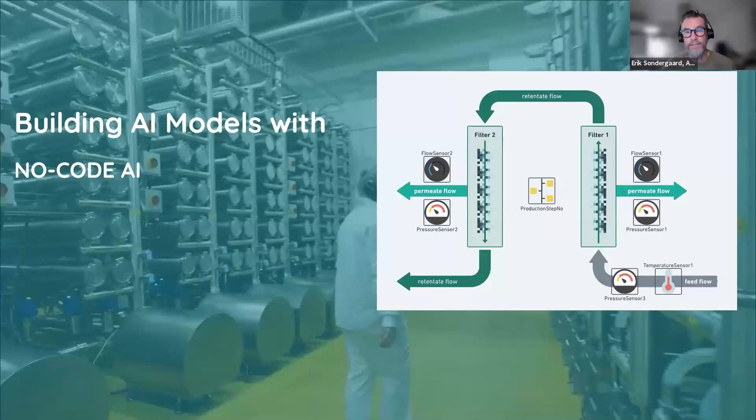So in IntelliSea, it looks like this. We have a menu on the left side, which is almost always the case with this type of software. And I want to create a model, and the way I want to create the model is that I want to detect this anomaly.

I go through this wizard and say, okay, what do I want to measure? I want to measure the flow sensor on one side, and I get immediately a trend curve, and you can see how fast the system is if you are zooming in or zooming out. Then I say, okay, what could have an impact? And I put in all the parameters that could have an impact on a filter breach, and I add the equipment and click next.

I give it a name, just like creating a Word document, and we now have the model. I will then say, okay, let's train the model, and it will be training for around 20 minutes.

Now I can see there are 2 lines up here, a yellow one and a blue one, and it's with the 2 filters that you are looking on. If I go back in the history data, I can see there are some red lines here. If I pause the movie here, you can see that these 2 lines should be very equal, but here there is a difference, and I can see the difference down here as well. Then it tells me there is a small breach in the filter.

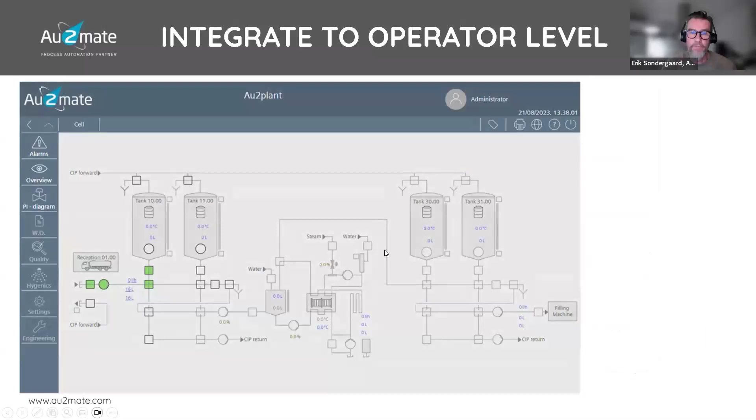Then the operator knows he should not make such big adjustments. So on the right side of the line, it's more flat, and they can go closer to the set points. For the operator running on the SCADA system, they've put in an AI button, and it will show them the historical data and the future data. That's how it's used.

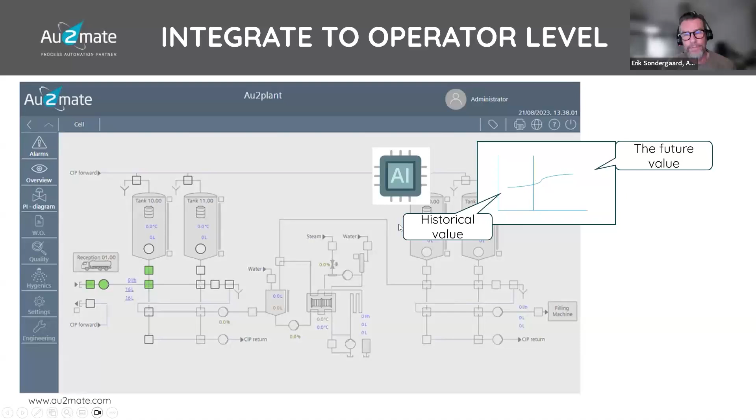The next two slides are more for sending out. Grace will send it out, but there are the typical issues people have when we talk to them and they are interested in AI. I'm almost running out of time, so I'll go a little faster through these.

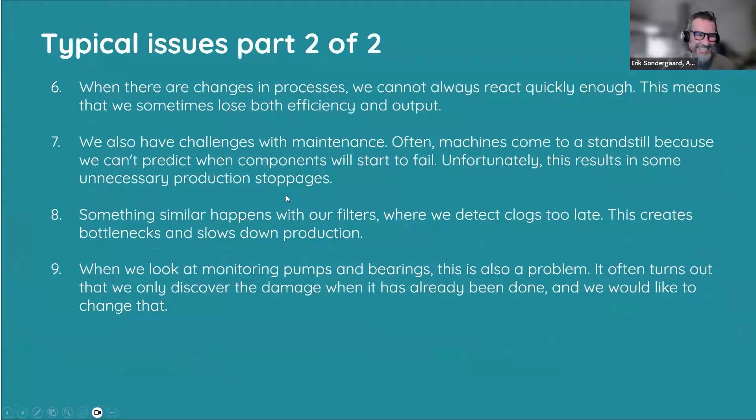This is just how it works. If you're interested, say, okay, could that be something for us? Well, on your customer side, we will read your data, and then it goes to the cloud where we have the big engines. And then we have two outputs: one is the IntelliSea front end, which you've seen now with the graphs and all that, and we can also put integration into your existing systems.

So we can help optimize production, talk about quality, and make data-driven decisions. And if some of you are thinking about what about the money, well, when we look at typical use cases, if you give us $1, you will get $3 to $10 back within 1 year. So it is a good investment.

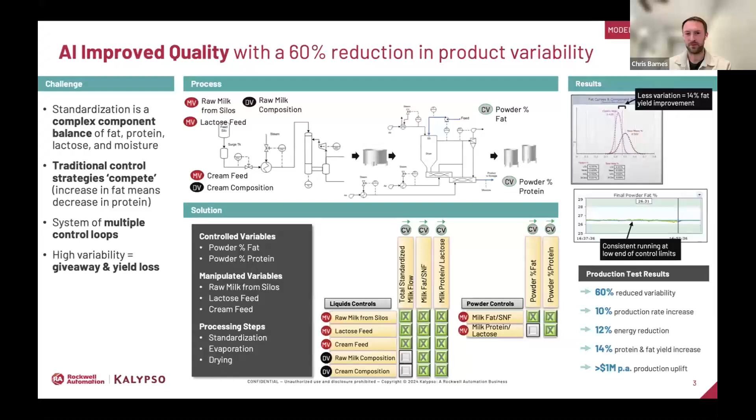Next, I want to highlight something more modern, but still mature from the standpoint that there's live capability out there in real world production, focused in this domain we call perfect fill. And so now we're again thinking about outcomes, or the end in mind, thinking about capacity gains.

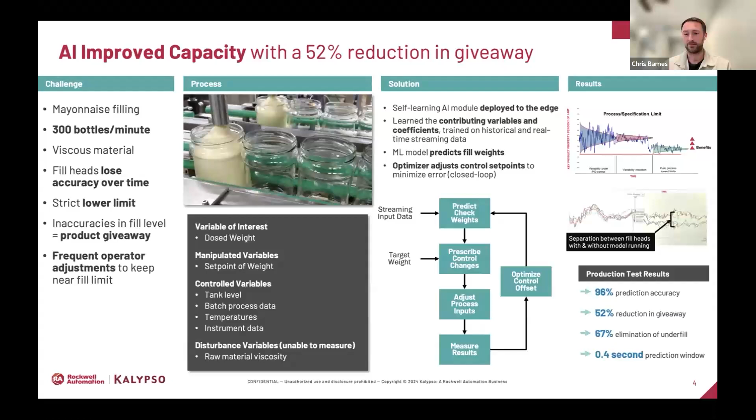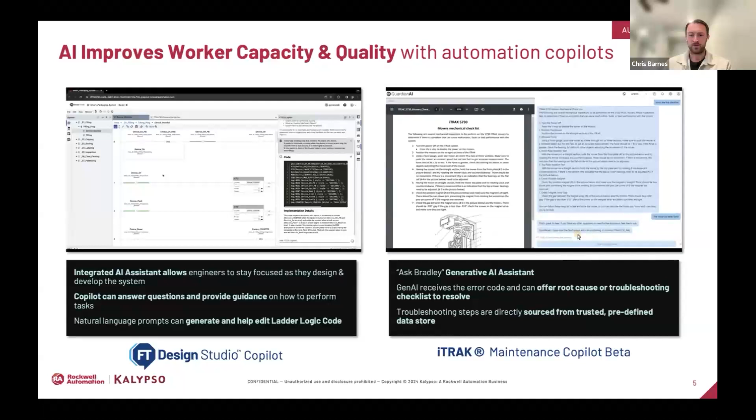And then on the right-hand side, what is running is a more frontline worker HMI level engine, which is monitoring for anomalies detected on equipment, and then translating those anomalies into the most likely issues or root causes of potential failures, and then pointing the user directly to the documentation such that I can accelerate that root cause resolution time and bring equipment back online. So again, this is more a look into the future of what's to come and a lot of innovation in this space.

I think the last thing to say is people always ask, this is great, you just showed me 3 uses of AI, you also showed me 5 other potential areas that I can consider. How do I get started and how do I know what to go after?

We counsel our clients in thinking about the opportunity and value analysis, getting to a high-graded set of use cases that are right sized for your operations and business. Think about the scalable and maintainable architecture in order to execute against that, and then really be systematic and thoughtful about your implementation roadmap as you go after executing your AI strategy.

All right, that was great, Chris. Thank you so much for that presentation. Super interesting, again, to see all that data at work and get a little bit of a glimpse into the future at what might be coming next.

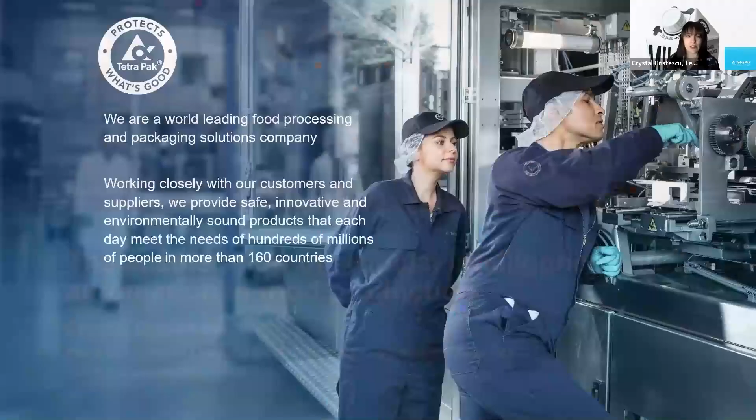I am a sales enablement leader at Tetra Pak. So just a little bit about Tetra Pak: we are a world-leading food processing and packaging solutions company. We work closely with customers and suppliers across 160 countries in these various applications.

So some of the trends that are going on, and why do we have this topic? There's discussions around lowering that total cost of ownership, increasing sustainability, looking at securing food safety and that quality effect, digitalizing around that skilled labor force, and of course, the legacy equipment and moving to more modern standards.

So what is the need for having smart factories to help address those? Of course, there's secure integration, making it more seamless for that total cost of engineering and startup, that optimization that we continue to look at with different operators around quality and lowering cost, and always having a secure connection and looking at different data points and values so that future discussions and decisions could be made.

So just looking at, I want to make sure everybody can see my full screen, correct? Okay, great. Yes. So some of the main things to discuss is looking at automation - usually to implement automation across the end-to-end, you'll see an increase around that overall equipment efficiency from 7 to 20%. And as far as the capital spend in the future, 25% of that is going to be accounted around automation and digitalization in those solutions.

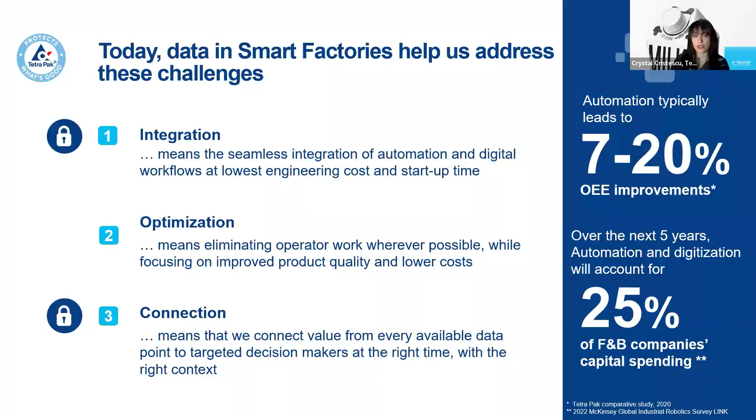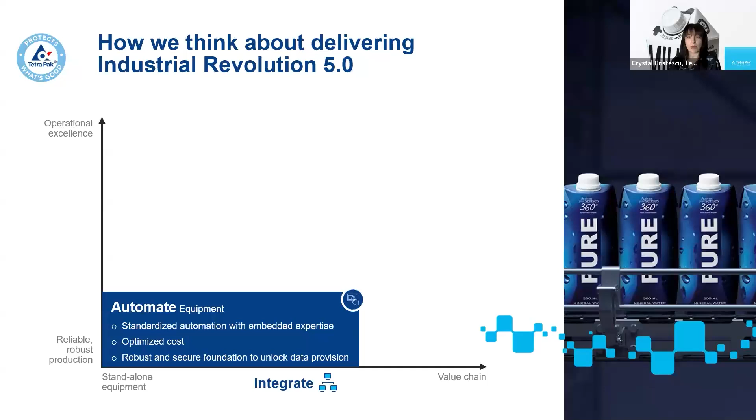So when we think about the Industrial Revolution and looking at, from 4.0 and now talking about AI in that 5.0 stage, there's some ways to look at all parts. Looking at automating at the equipment level and providing those standards and optimizing that cost. Then at the complete factory level, end-to-end solutions and orchestrating some of that data across the factory. And then at a business or enterprise level, or even multiple factories, using those insights and that data to understand and create different solutions and cost optimizations, and that excellence in general.

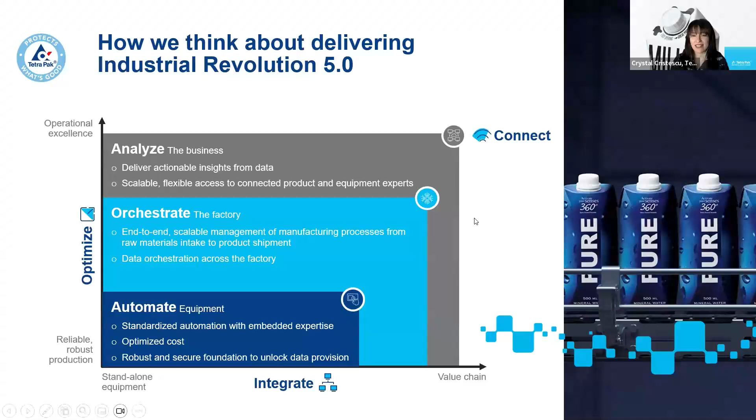And so just looking at baselining again with automating at that factory floor level, there's 10 ways or opportunities: increasing uptime, reducing that human error, saving on materials, standardization, traceability. And in order to do some of that and look at optimizing that continuously, making it repeatable, as was discussed, the variability, and then creating that reliable data source, and then understanding what that data means.

So just understanding how the data orchestrates from end to end. You'll get data points from milk reception all the way through shipping areas, looking at time, transactions, and different events across all those data collection points. And how could we then better understand and prepare that data, be able to conceptualize it, and then create an analytics model and that visualization.

And then finally, with all that data, you're able to see those insights at that high business level, and then create those decisions for quality and a number of resource improvements like asset, energy, and material management.

And then at that high level discussion, we're going to be including a number of teams and being able to hit different KPIs across the board, whether it's with the business experts or looking at some of the inputs and the data that may be looked at on the data side through the data scientist and the OT and IT engineering.

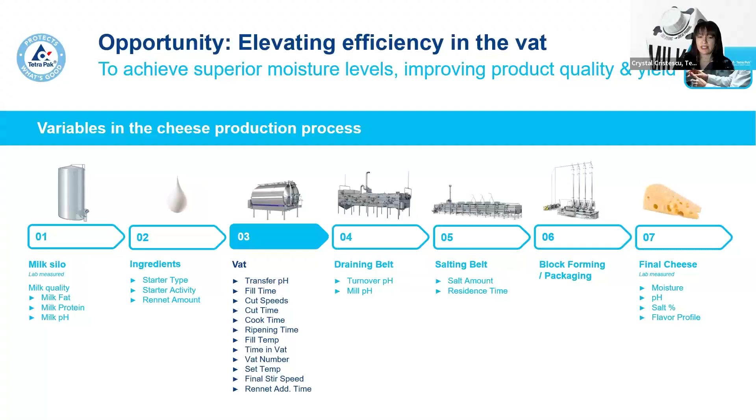So the challenge was that we were asked to help achieve superior moisture levels, decrease that pH, improve the overall quality, and increase the yield.

And so the solution was something that was going to be more scalable across multiple factories, being able to validate it through clinical trials and then make it seamless through different parts of the process without much disruption and cost, and then tailor that solution based on those unique production needs.

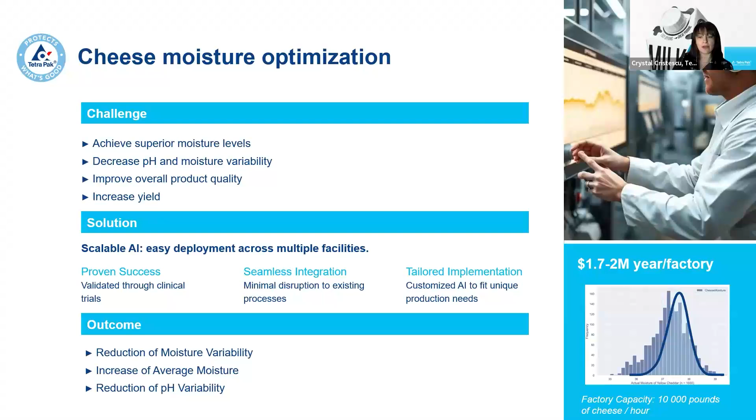And so the outcome was a reduction of moisture variability, an increase of average moisture, and a reduction of pH. That yielded between 1.7 and 2 million yield per year per factory, looking at a capacity of 10,000 pounds of cheese per hour.

The second one I'll talk about is the cleaning in place optimization. This particular example was around the high protein drinks. The pictures on the left showcase through our aseptic ultra high temperature process the buildup and the fouling that was formulated.

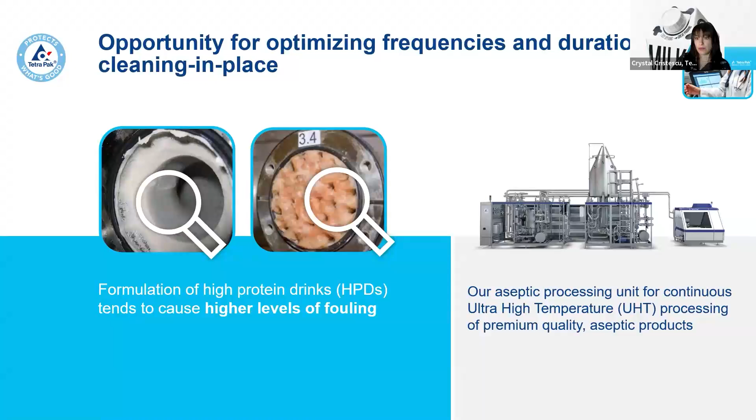The challenge was there were a number of production halts due to those cleanings, and of course a risk of contamination. So we used AI-driven recommendations based on the algorithm that was analyzed using different data points to predict the optimal timing for when the CIP needed to take place.

So it reduced downtime and improved sustainability, which led to an increase in production time. It extended the machine runtime between a half an hour and 2 hours per cycle, which also helped reduce the contamination risk by making sure it was cleaned when necessary.

And that led to a $1.3 million revenue increase per year per factory, utilizing clean in place on 3 machines.

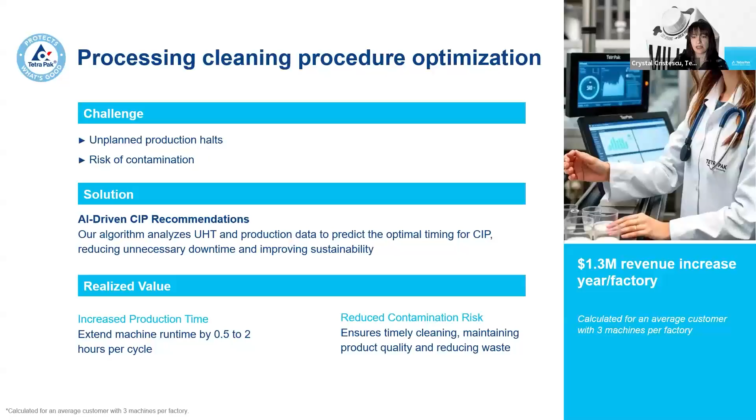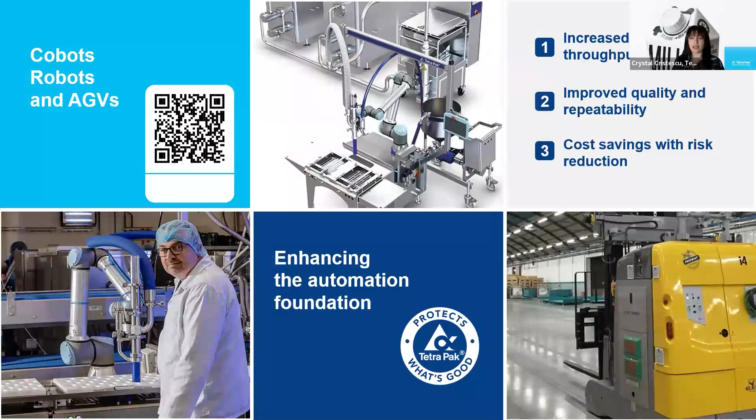Thank you so much, Crystal. Very interesting information and really impactful to see all of the different applications and the ways that those technologies can create real and significant improvements and gains.